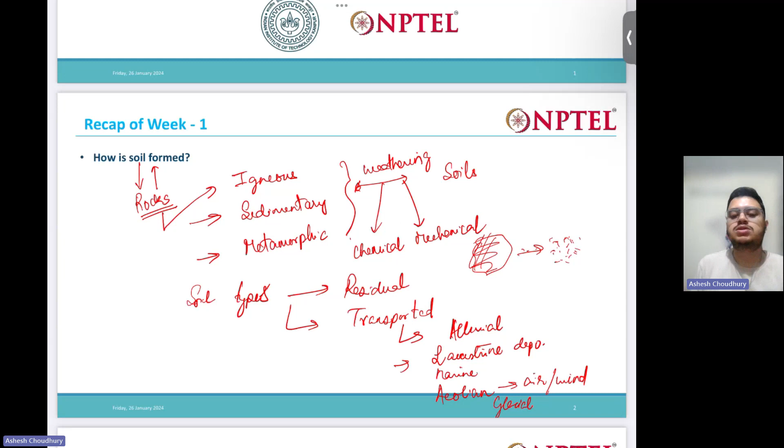The first thing that we studied was soil formation. There are various types of rocks: igneous, sedimentary, metamorphic - these are the main type of rocks. From these rocks, how are soils formed? Soils are mostly formed by weathering, chemical or mechanical weathering, and then they are transported - residual, all these types of soil we studied.

After that, we introduced soil as a three-phase system - the basic main concept of soil. It is composed of three phases: solids, water, and air. Based on this three-phase system, we derived some properties known as the index properties.

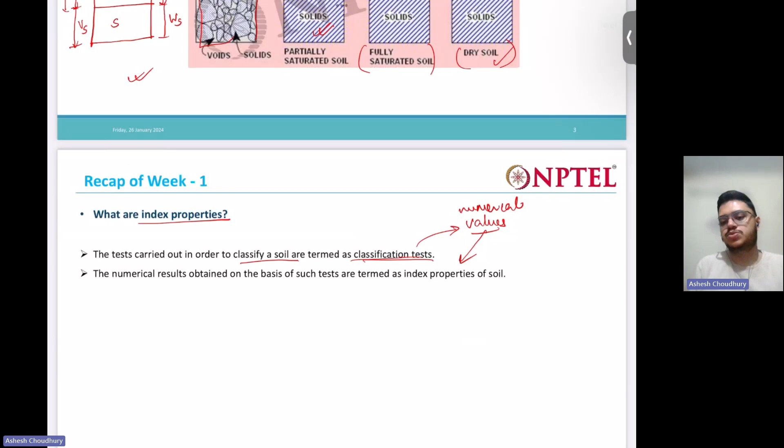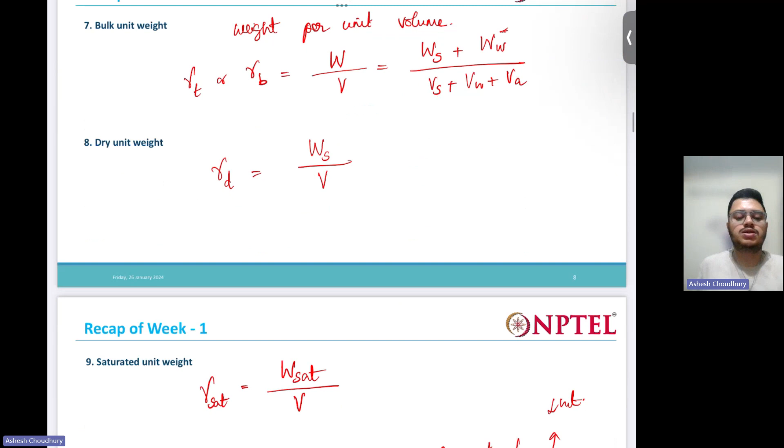So what are the index properties? The tests carried out in order to classify a soil are known as classification tests, and the numerical values obtained from these tests are termed the index properties. Various index properties we studied after that: water content, void ratio, porosity, degree of saturation, air content, percentage of air voids, then bulk unit weight, dry unit weight, saturated unit weight, submerged unit weight - all these types of unit weights we defined, then specific gravity we defined.

After that, we studied the grain size distribution curve and how we can obtain it. The grain size distribution curve can be obtained through sieve analysis. There are two types of sieve analysis: dry sieve analysis and wet sieve analysis. From there we determine the grain size distribution.

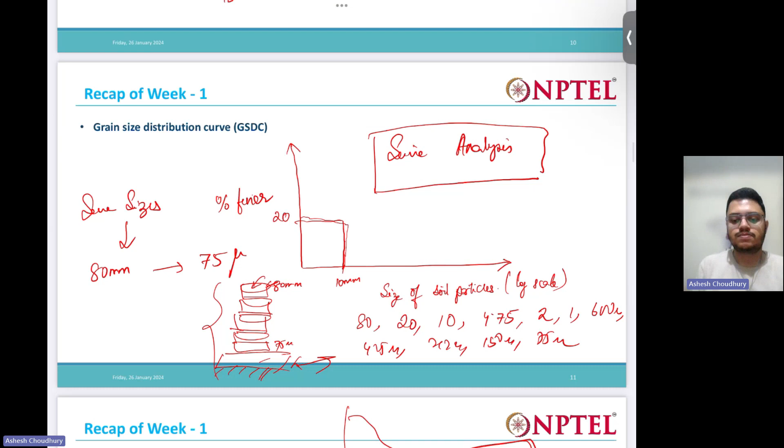We studied how to do the sieve analysis. Then beyond dry sieve analysis, we studied the hydrometer analysis - how to use the hydrometer to determine the fine fraction, to determine the gradation of the fine particle fraction. For that we use the hydrometer, so that we also discussed.

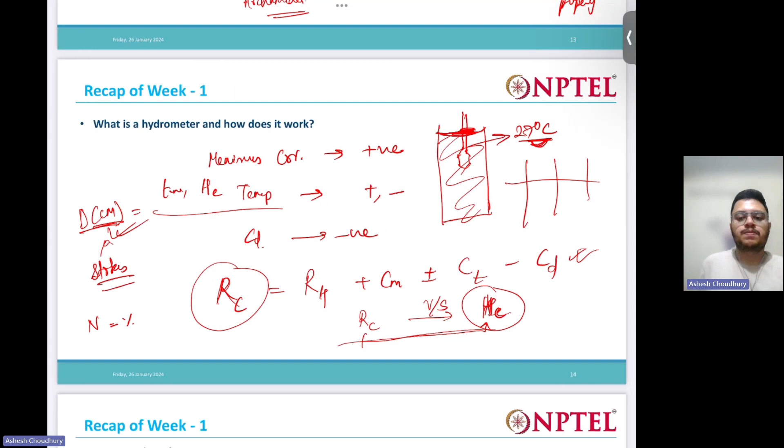Then we studied various corrections - the temperature correction, the dispersing agent correction - all these corrections in hydrometer reading. After that, we defined the D10 size, which is the effective size, CU - coefficient of uniformity, and CC - coefficient of curvature. Those are needed to define the granular soil as well graded or poorly graded.

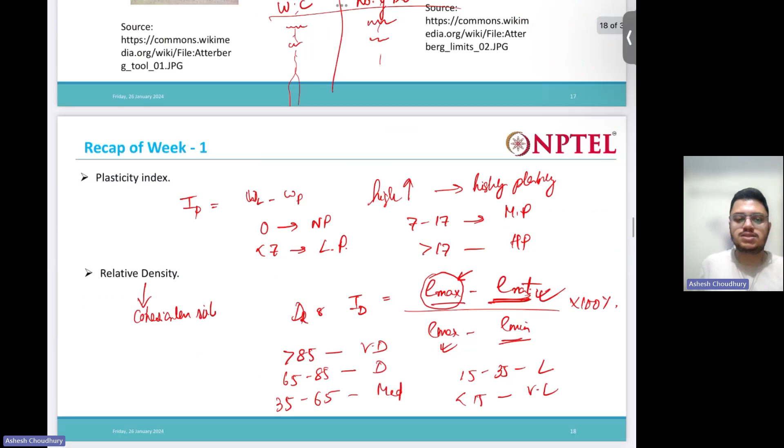After that, we defined the consistency of clays, that is the degree of firmness, and then we defined the Atterberg limits - liquid limit, plastic limit, shrinkage limit. All these things we defined, and how to find out liquid limit and plastic limit we also saw, along with plasticity index, relative density, and other properties.

Then we proceeded to solve the problems. So those were the basics, the main basics of soil mechanics. These basic properties we had used all throughout the course.

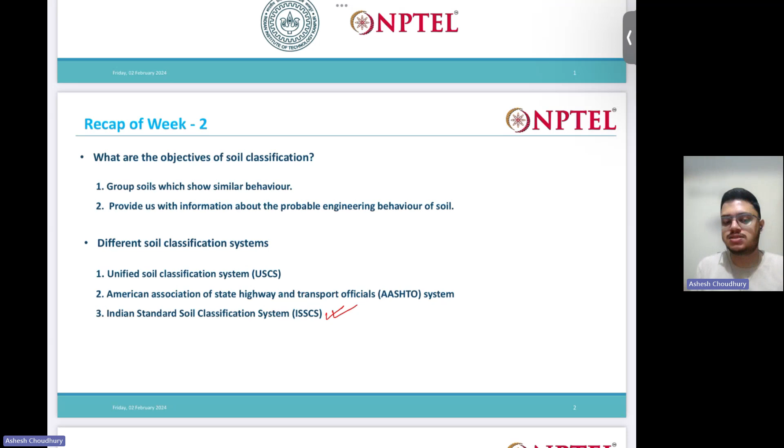In the second week we studied soil classification. Yesterday we recapitulated it by solving a problem. So how do we classify soil? There are various systems - USCS, ISSCS. We mostly focused on the Indian Standard Soil Classification System, which divides soil into major groups. And how do you identify each of these groups? We saw that.

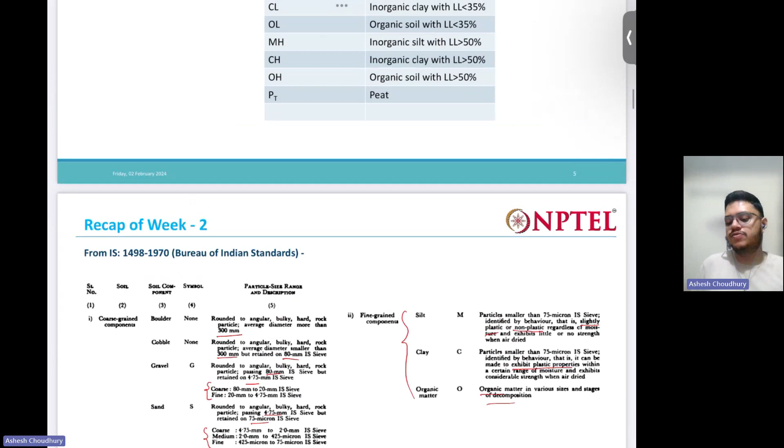If the fraction of soil more than 50% is passing through 4.75 mm, and less than 50% is passing through 75 micron, then the soil is coarse grained sand. Like this we divided the granular classification into many parts. This is the summary of that.

Then we saw how to classify fine grained soil. For that we need to use the A-line chart. The equation of the A-line is 0.73(wL minus 20). If the soil plots above the A-line, it's clay. If it plots below, it's silt.

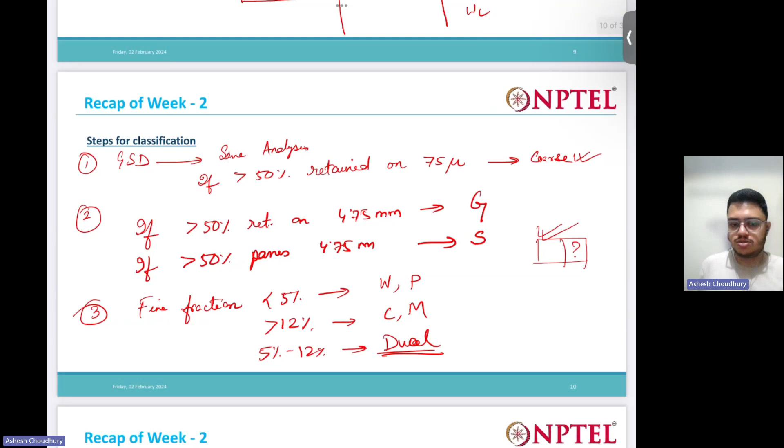Also we discussed various dual nature conditions, where for dual classification we need to use dual symbols. All these things we summarized. I am not going one by one, step by step, in detail.

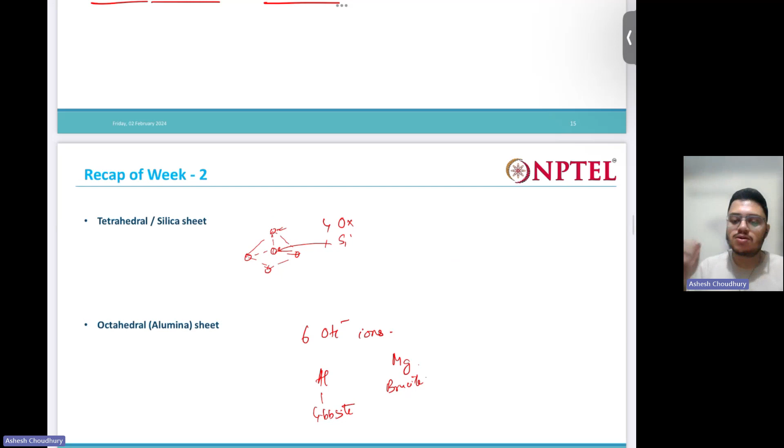After that we also saw what soil structure is, and what specific surface is, and how this influences soil behavior. Then we saw the main minerals that form soil, and the structure of those minerals - the basic constituents and how those soil minerals are formed.

So what are the basic minerals? Kaolinite, montmorillonite, and illite - these are the basic minerals which form fine grained soil. We studied this, and after that we solved numerous problems related to soil classification. I hope this is clear to you, because we will be needing this throughout your life. You should not forget soil classification.

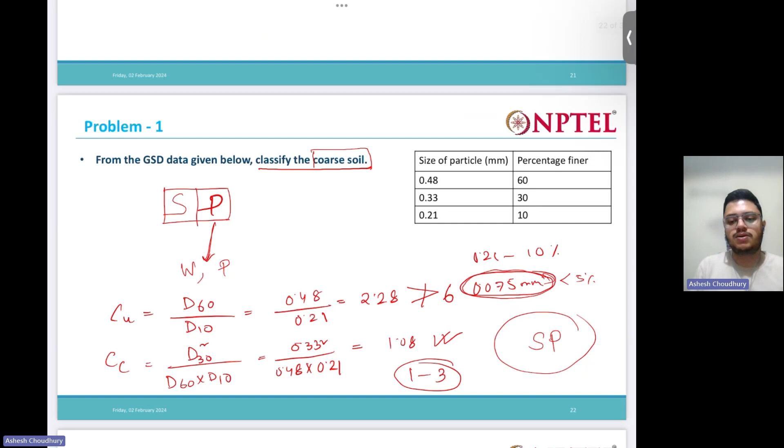Then in the third week we studied soil compaction. So what is soil compaction? Soil compaction is densification of loose soil.

How do you generally do soil compaction in the field? By using road rollers, by tamping, all these things. So what is soil compaction? It is the densification of soil by removal of air. You provide some external mechanical effort, due to which the air in the soil matrix gets removed, and the soil grains attain a denser configuration.

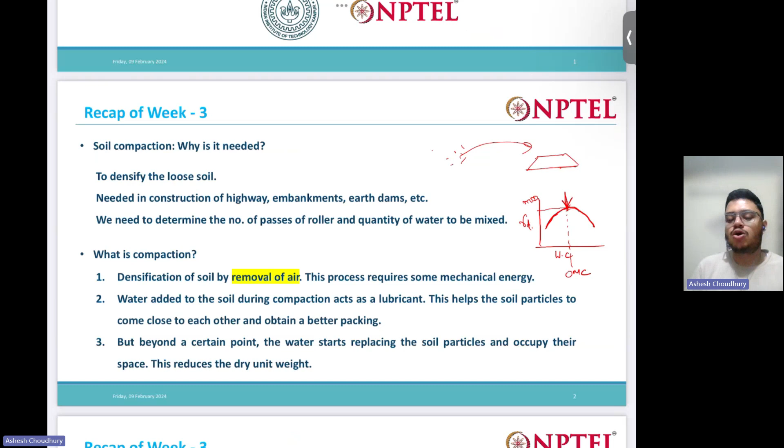Water is added during this compaction process. What does water do? Water acts as a lubricant. This bell curve you see is the typical compaction curve that you obtain. At a certain point you achieve the maximum dry density, and that maximum dry density corresponds to a water content known as the optimum moisture content or optimum water content.

To find the maximum dry density and water content of a particular soil, we use the Proctor test - the standard Proctor test, to determine the OMC. In this test we have a mold of certain volume and size, and we place the soil in a particular number of layers and then tamp it. There is the standard Proctor test and also a heavy compaction test. In both cases the hammer weight, number of layers, and number of blows differ - meaning the compactive effort differs in both cases.

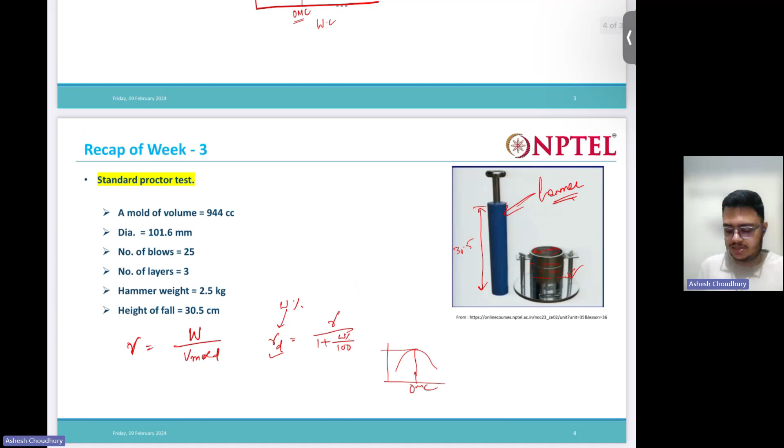Then we defined the zero air void line. What is the zero air void line? It is the theoretical maximum line of maximum dry densities that you can achieve. Generally the compaction curve never touches the zero air void curve - it is always below that.

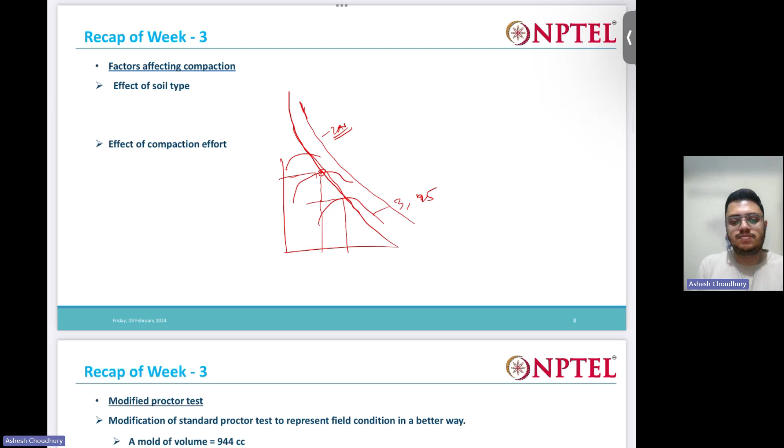Then we studied the various other factors that affect soil compaction - all these things we revised. There is also a modified Proctor test, where the compacting effort is higher because the number of blows are higher, number of layers are higher, and so on.

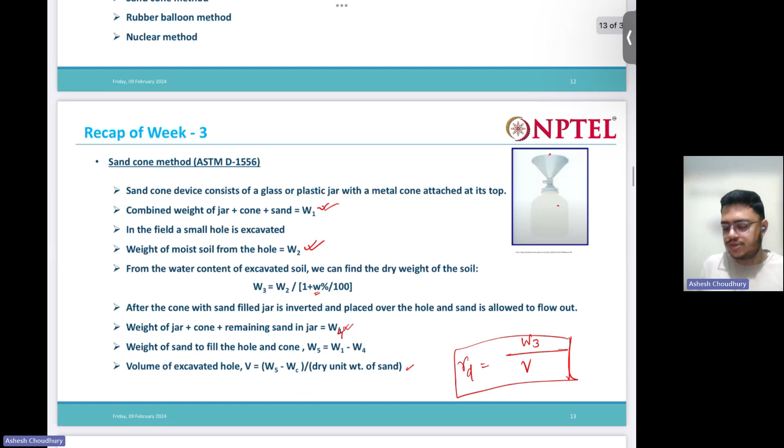Okay, and how do you actually measure the dry density in the soil? There are various methods: sand cone method, and the nuclear method. We discussed the sand cone method in detail, and you can read about all other methods also in your standard textbooks.

After that, we introduced the permeability topic. So what is permeability? Water flows through soil with the presence of interconnected voids. How easily the soil allows the flow of liquid through it is defined by the permeability coefficient. We generally start from the hydraulic gradient, then define Darcy's law: velocity of flow is proportional to the hydraulic gradient, and then we introduce the constant of proportionality, K, that is the coefficient of permeability.

Just a second. Just a minute, I'm getting a call. Just give me one minute. I'm very sorry for the interruption.

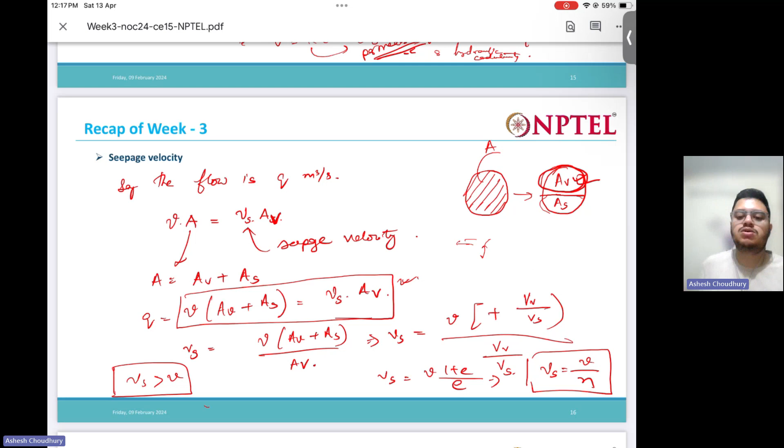Then we define seepage velocity. The seepage velocity is always greater than the superficial or average velocity. That also we derived, and we defined the relation Vs is equal to V by n. There are various factors that affect hydraulic conductivity. Then we solved the problems.

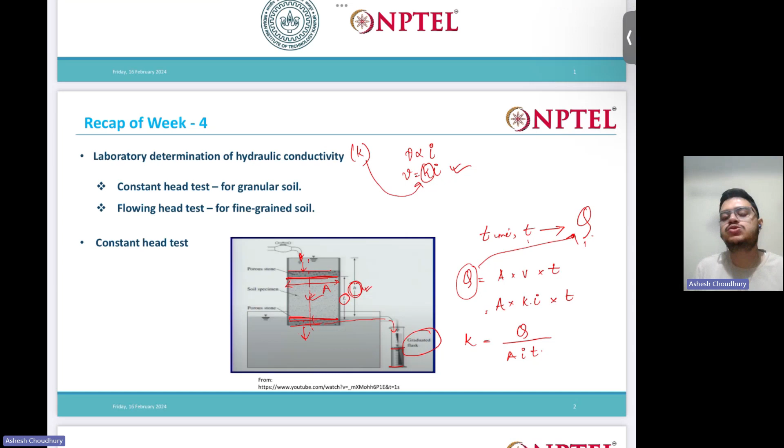Then in the fourth week, in the starting, we saw some tests used for the determination of hydraulic conductivity, or the laboratory determination of hydraulic conductivity. The basic tests are the constant head test and the falling head test. The constant head test is generally used for granular soil, and the falling head test is generally used for fine grained soil. For both these tests, we derived the expressions for the coefficient of permeability.

For the constant head test, the expression is K equals QL by AHT, where Q is the flow, L is the length of flow, A is the cross-sectional area, H is the constant head, and T is the time.

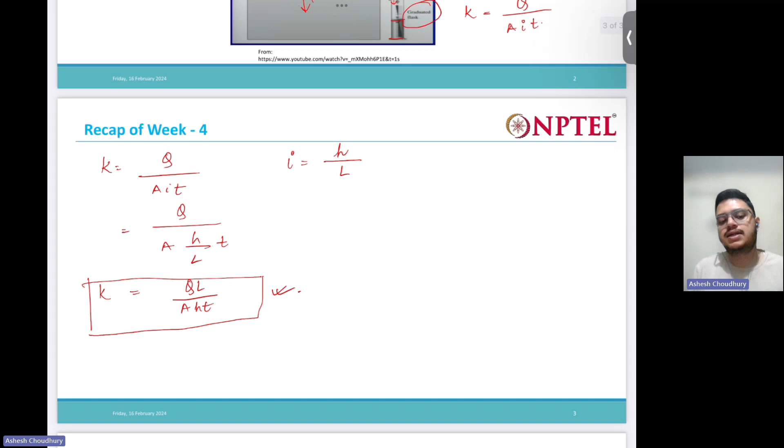Then we derived the expression for the falling head test. In time t1 to t2, the head falls from h1 to h2. Using that, we derive K equals aL by At, times ln of h1 by h2.

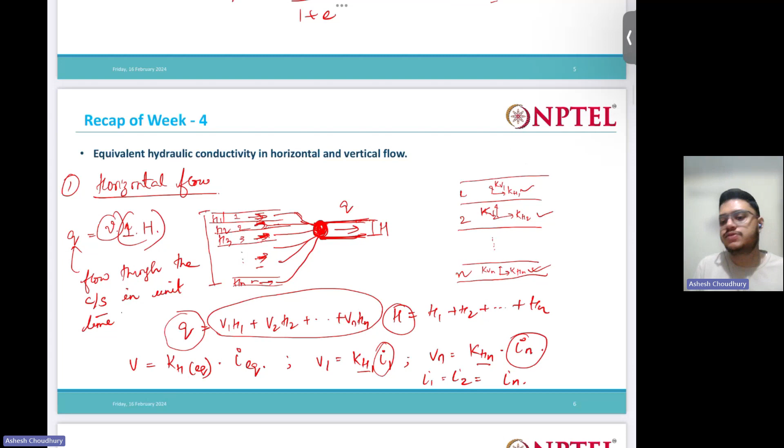Now, apart from the tests, there are some empirical relations also which relate the coefficient of permeability with several other parameters, so those we discussed briefly. Post that, we derived expressions for equivalent hydraulic conductivity, in the horizontal direction and equivalent hydraulic conductivity in the vertical direction. Those you can see here clearly.

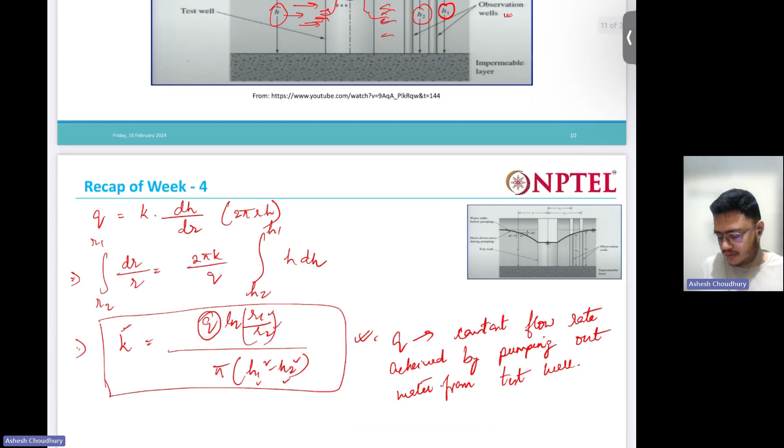Now one more important thing: how to determine hydraulic conductivity in the field. One of the most common methods is the pumping from well method. We discussed how this pumping method is used to determine the hydraulic conductivity, and then we derived the expression. So this was all about permeability.

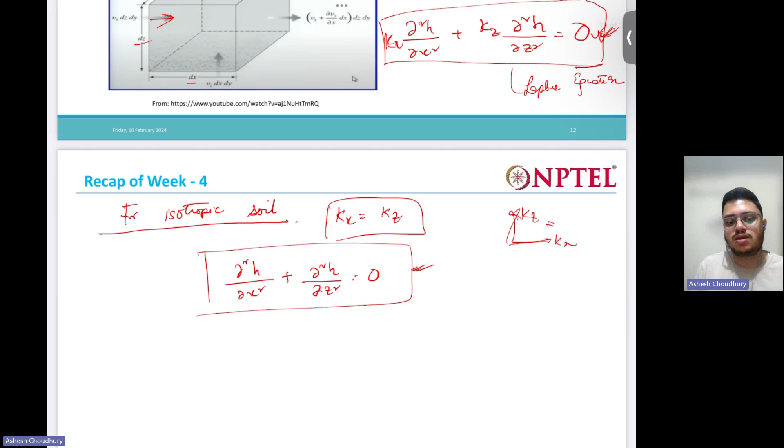For 2D flow we derived the Laplace equation: kx times d square h by dx square plus kz times d square h by dz square, where kx and kz are the coefficients of permeability in the x and z directions. For isotropic soil, kx and kz will be the same, and for that we can write this simplified Laplace equation. For 1D flow we can write this. So we saw all this stuff.

Then the solution of this Laplace equation is nothing but the flow net. There are some properties of the flow net: these lines are orthogonal to each other, cutting at 90 degrees, and they form a family of curves. In a flow net there are two types of lines: one is the equipotential line and the other is the flow line. So all those things we saw.

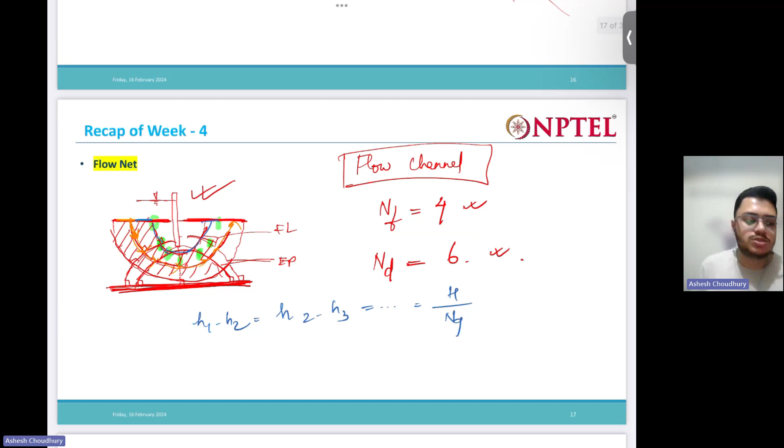We derived various expressions for how, using the flow channels and equipotential lines and equipotential drops, we can actually determine the flow. First we draw the flow net, and from that we find the number of flow channels and number of drops, and from that we can calculate the amount of flow that is happening.

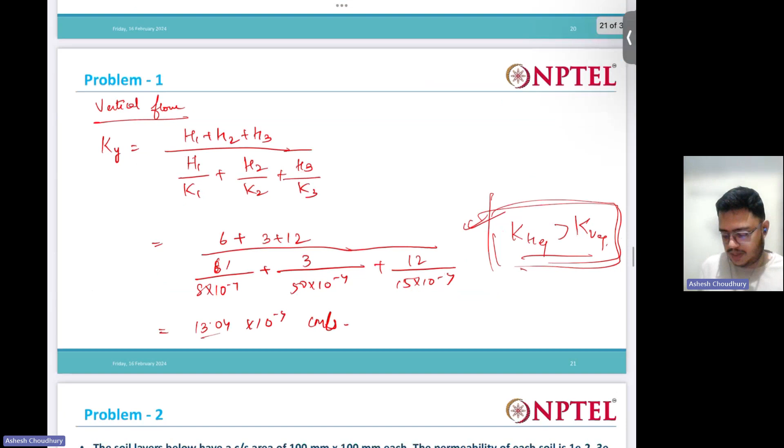Then, as usual, we solved many problems from this topic. I hope these problems are clear to you, and I have solved each one, but I still suggest that you solve all these problems once again by yourselves. Only then will all the concepts be clear, and if I have made any mistake, you can correct it. You should check all the results by solving it yourself.

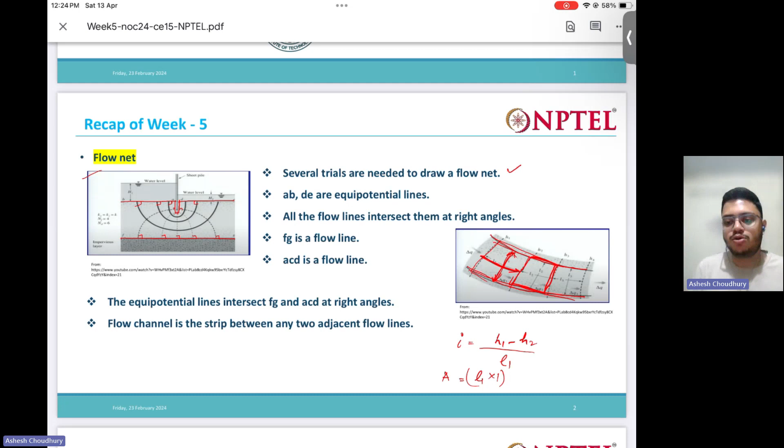Then we discussed how to draw flow nets. Several trials are needed to draw a flow net. I showed you what equipotential lines are, what the boundary equipotential lines are, and what the boundary flow line is.

And for anisotropic soil, what if the soil is anisotropic? Kz and kx are not the same. At that time, how to approximate the Laplace equation, that we also saw.

Flow net is regularly used for determining the uplift pressure under a hydraulic structure, and regarding this we also solved some problems where we determined the uplift pressure from the flow net.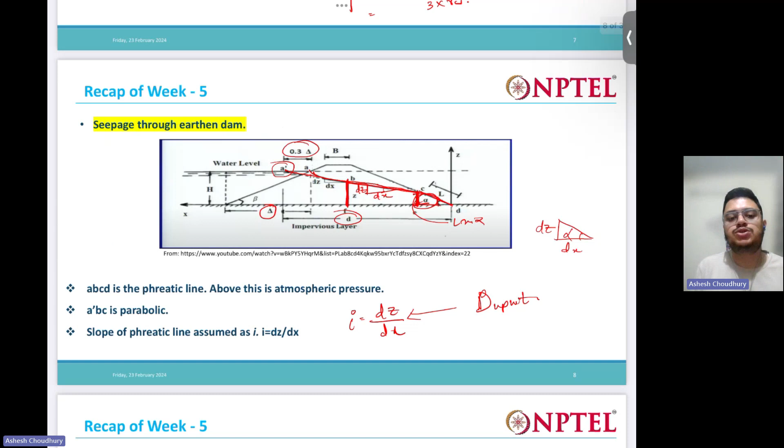After that we started on seepage through dams. These were derived in detail in the class, in the lecture by Professor Ghosh. I think this should all be clear. We saw how seepage through an earthen dam is actually calculated.

That was all about that. Then we understood what in situ stresses are. This is one of the most important concepts: the concept of effective stress. Effective stress is nothing but the stress that is carried in the grain to grain contact. Total stress is composed of the pore water pressure, or neutral stress, and the effective stress. We discussed how this concept of effective stress actually comes about.

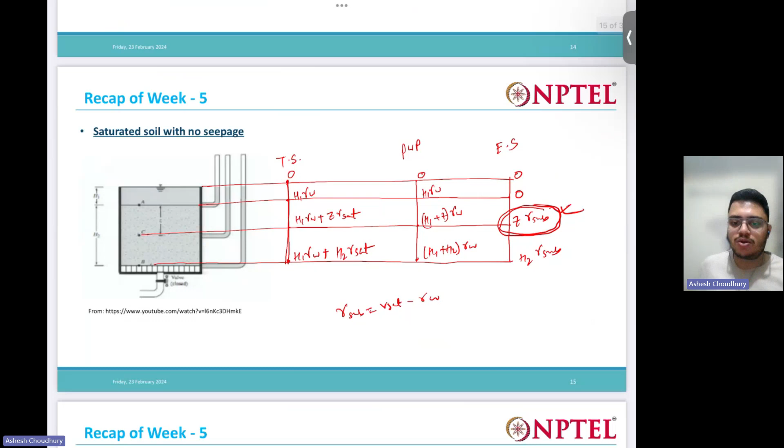Then we saw various cases of seepage condition: no seepage, downward seepage, upward seepage. We plotted total stress, pore water pressure, and effective stress for these. We saw that for upward seepage, the effective stress actually gets reduced due to the effect of upward seepage, and that gives us a critical condition.

If this effective stress becomes zero, the hydraulic gradient at which it becomes zero is given as the critical hydraulic gradient. This critical hydraulic gradient leads to a piping condition, and it varies from 0.9 to 1.1, given by G minus 1 over 1 plus e. Yesterday, if I remember, we had solved one problem regarding this critical hydraulic gradient.

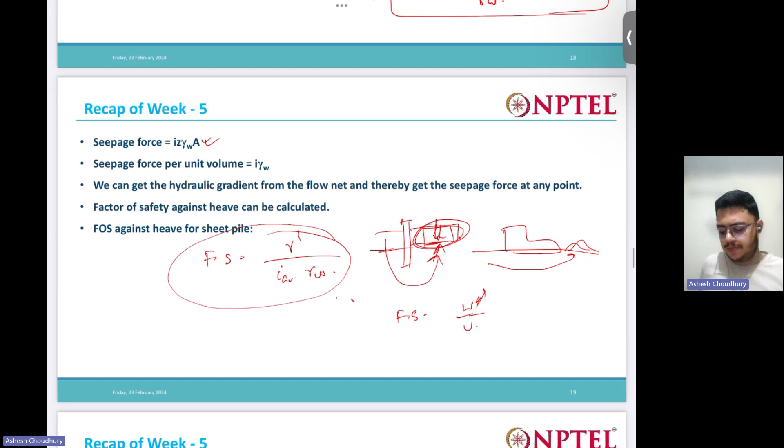Then we derived a term called seepage force. We saw all these things, and then we solved the problems. We solved many problems from this effective stress part, including calculation of effective stress, calculation of total stress, effective stress, and pore water pressure.

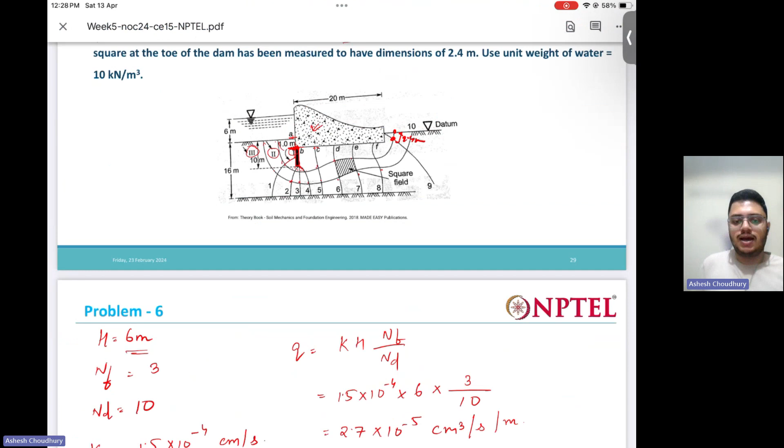And then we calculated some problems regarding seepage through a dam. Also, we solved many problems where we found out the uplift pressure below a dam. I think all these things are clear to you.

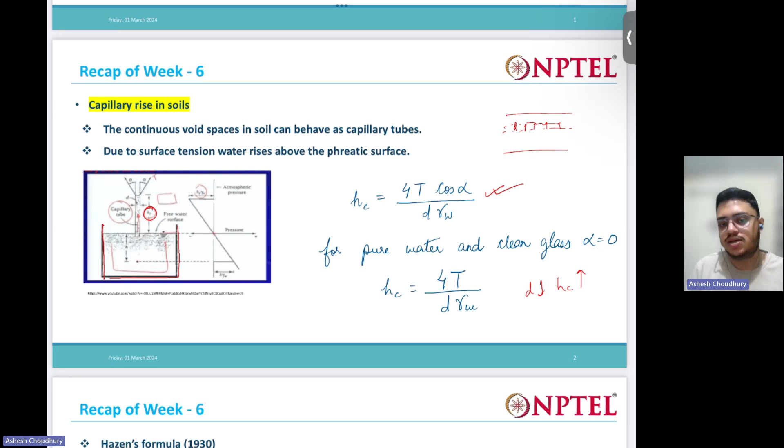After that, we defined capillary rise, how to calculate the height of capillary rise, and what capillary rise is. We also saw what happens to the effective stress in the zone of capillarity. Due to the suction, the effective stress in that zone actually increases, as the pore water pressure becomes negative, leading to the increase in effective stress due to suction.

We introduce one of the most important topics, consolidation, using the spring cylinder model. Initially, when you apply load and are not allowing drainage, the whole load is transferred to the water for a saturated soil. Remember, consolidation is defined for fully saturated soil.

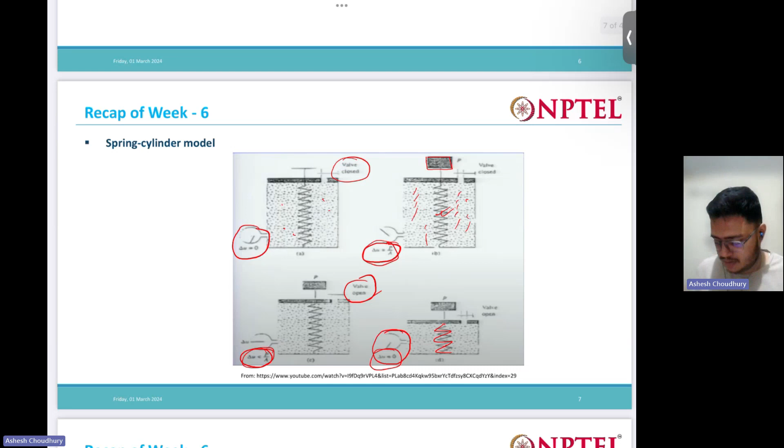As soon as you open the valve, water starts coming out and the load is transferred from the water to the spring, which is the analogy for the soil grains. So the effective stress actually increases, and we saw all the boundary conditions for this.

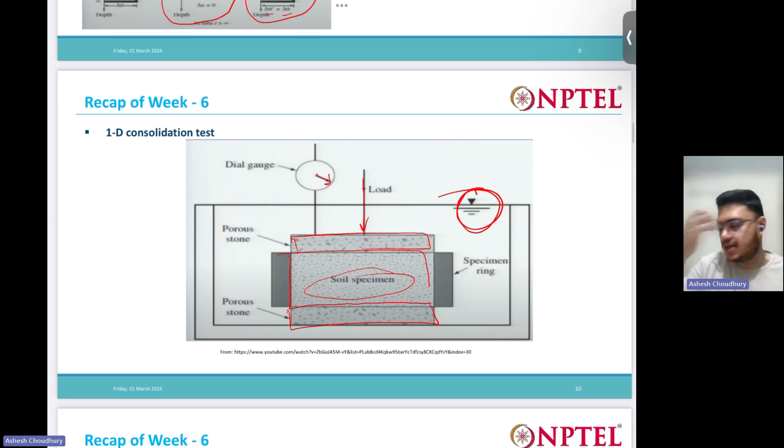Then we discussed the one dimensional consolidation test. We discussed how we can do the test, and how we can get the curves that we need.

So in consolidation, first is the initial compression, that is the elastic settlement, then you have the primary consolidation, and then you have the secondary consolidation.

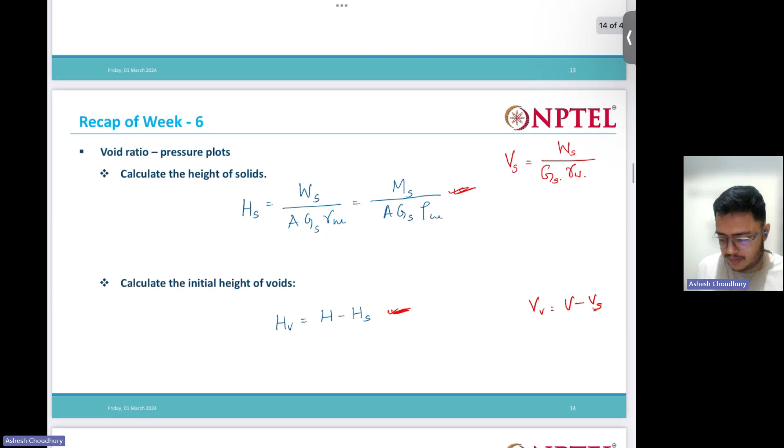So how to generate these void ratio pressure plots? We saw how to generate a typical void ratio pressure plot. There we defined various coefficients: the coefficient of compressibility, compression index, coefficient of volume change, and swelling index coefficient. Among these, Av, Cc, and Mv we regularly use to find the consolidation settlement.

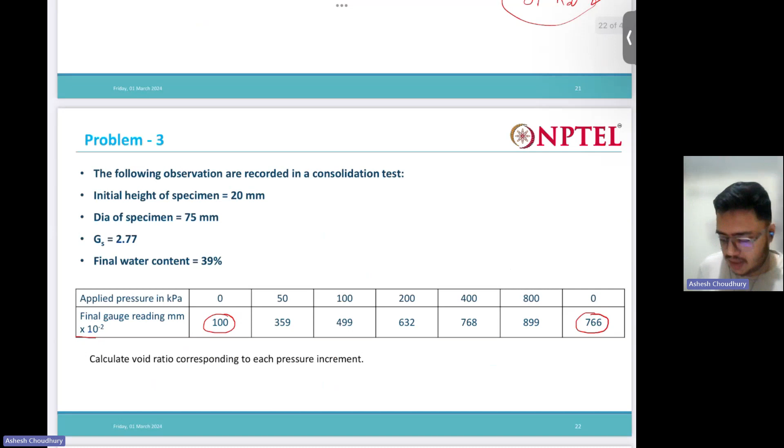We solved numerous problems regarding finding the void ratio pressure settlement curve. I told you that you should be very careful when making this table, else you are going to make a mistake. Generally students make mistakes here. You should be very careful about which void ratio you are calculating the next void ratio from, and all those things.

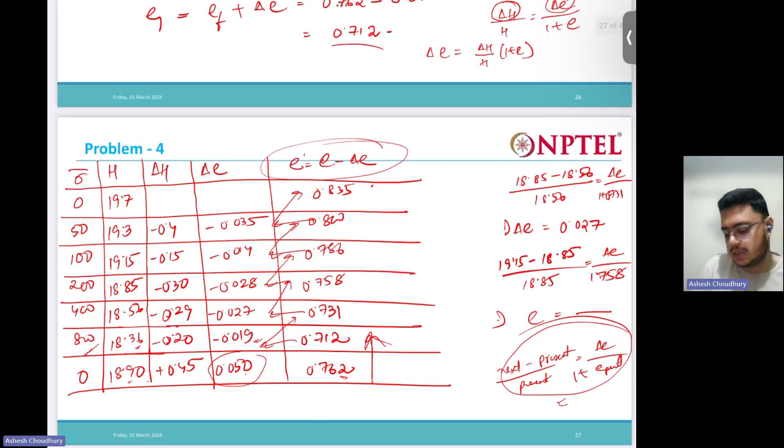Other things we already discussed, right? We generally take a 2:1 distribution of load, and that we take as the increase in load. From that load, how much consolidation settlement is occurring, all these things we calculated.

So next we have these e versus pressure plots, which is what you need to calculate from the 1D consolidation test, right? That we saw.

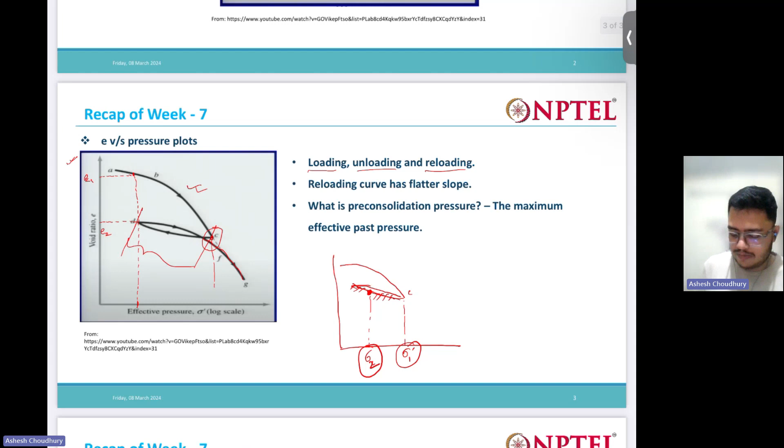There is a loading curve, unloading curve, and reloading curve. We discussed what the pre-consolidation pressure is, and how to determine it using Casagrande's method. We need to draw a straight line first, then draw a tangent, then do the angle bisector, then extend the straight portion backwards to the point where it intersects. That will give the pre-consolidation pressure.

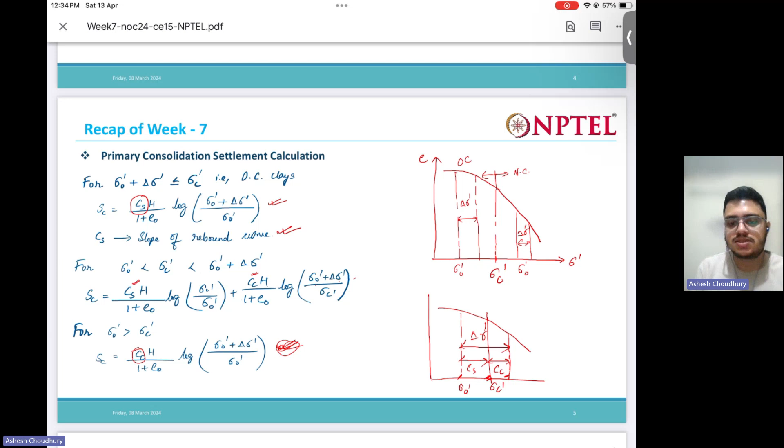For settlement calculation, there are various conditions or circumstances that might come up, and those are discussed here.

Then we discussed secondary consolidation settlement. Secondary consolidation settlement is extremely low. It happens after the primary consolidation settlement due to some plastic readjustment, so it is actually very low.

Then we discussed Terzaghi's one-dimensional consolidation theory, from where we defined the basic consolidation equation: du/dt equals Cv times d-square u by dz-square. That is the basic consolidation equation. From there we defined the coefficient of consolidation, which is k by gamma w times mv.

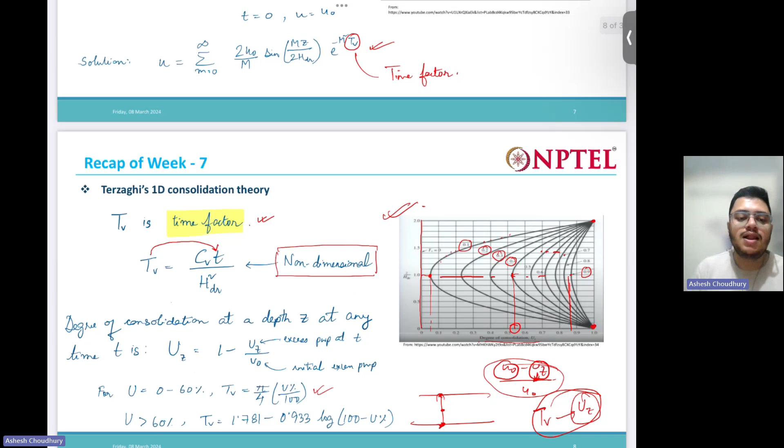From there we saw the solution of Terzaghi's consolidation theory, where u is the pore water pressure, given by this expression involving the time factor Tv. This time factor relates to the time needed for attaining a certain degree of consolidation. This is one of the most important expressions: Tv equals Cv times t divided by drainage path squared.

Okay, then we solved many problems from this. We solved problems related to settlement calculation. Then we solved problems related to how much time will be required for attaining a certain amount of settlement. All these things we solved.

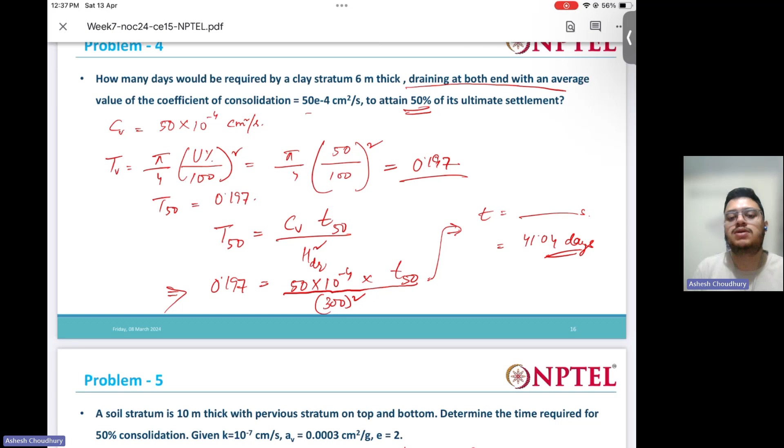And yesterday also we solved one problem. So if you remember, if the drainage path is reduced by half, then the time to attain a particular amount of settlement actually reduces by 4 times. So these were all that we solved. We solved many problems actually.

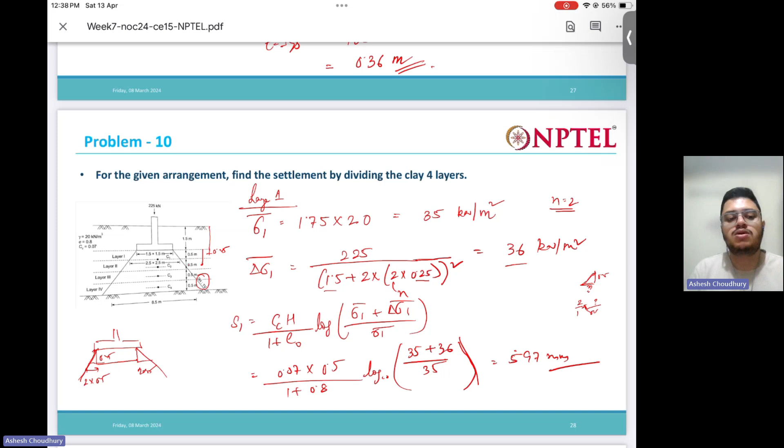So first you divide into 4 layers, then calculate the consolidation settlement, and then divide it into 5 layers and calculate again. After that, if you find the difference between the two is not greater than some tolerance value, you can say this is the optimal number of layers. Otherwise you take more layers. So using a small, easy computer code, you can actually find this.

Okay, so these are all that we did.

After that, we started one more important topic, that is the shear strength of soil. So what is the shear strength? Shear strength of a soil mass is the internal resistance per unit area that the soil mass can offer to resist failure and sliding along any plane inside it. That is how we define the shear strength.

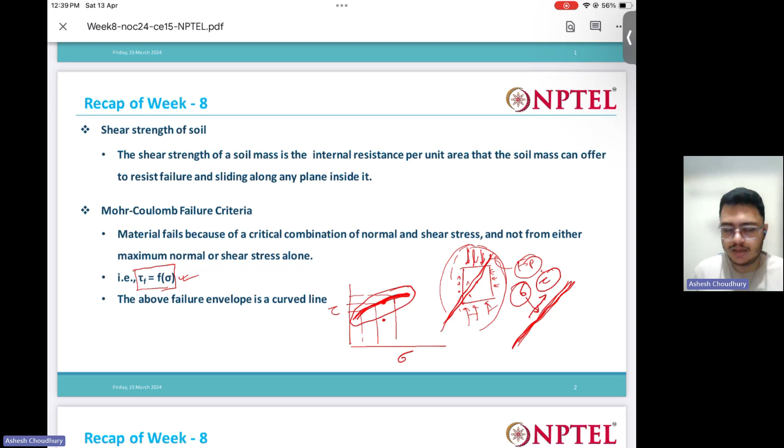One of the main basic criteria is the Mohr-Coulomb failure criteria, which defines that the shear stress at failure in a soil mass is a function of the normal stress. That is generally a curved, non-linear line, but it was linearized using Coulomb's theory, where the shear strength at failure is given as tau f equals c plus sigma tan phi. Here c is the cohesion of the soil, phi is the friction angle, and sigma is the normal stress.

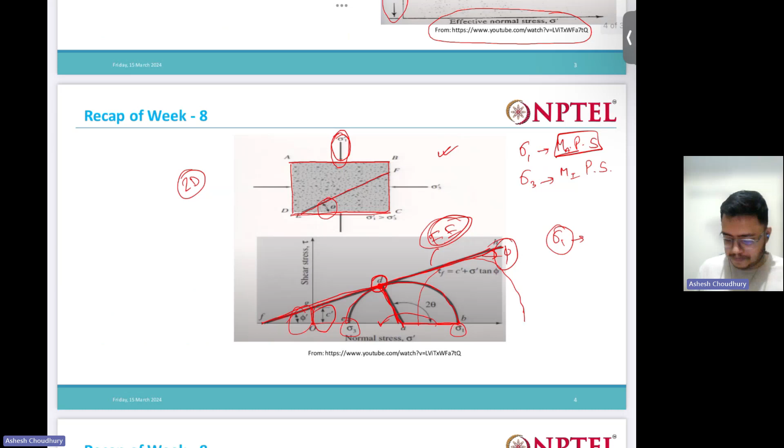c is generally zero for sand or inorganic silt. But then we saw the Mohr circle, and how actually we get this failure line.

After that, from the Mohr circle, we determine one more important expression, the relation between the principal stresses sigma 1 and sigma 3. The Mohr-Coulomb failure criteria in terms of principal stresses is: sigma 1 prime equals sigma 3 prime tan square (45 plus phi prime by 2) plus twice c prime tan(45 plus phi by 2). Now, tan square (45 plus phi by 2) is nothing but Kp, right, Kp.

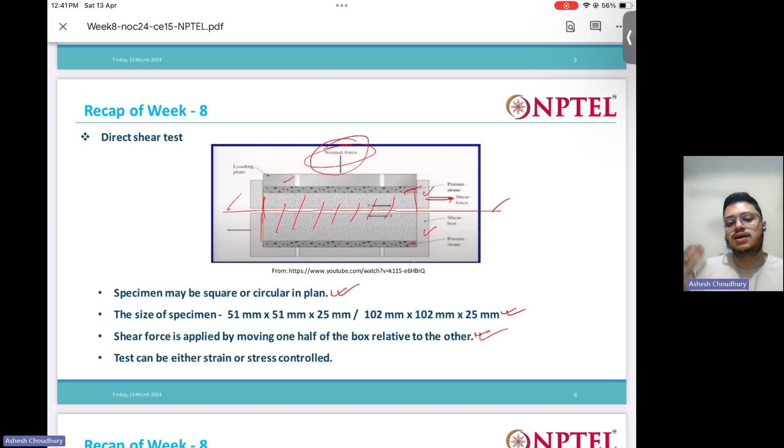Then one of the simplest tests to determine the shear strength parameters, C and phi, is the direct shear test. In this test, we shear the soil mass along a predefined failure plane. We put a normal force and see at what shear stress failure occurs, and we do that at different normal forces, then plot the curve. From there we can get C and phi by joining the plotted points with a line.

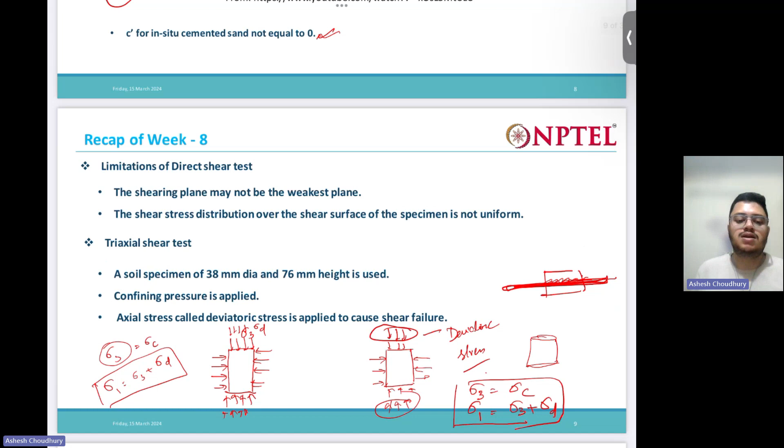These shortcomings are actually overcome in the triaxial test, where we use a cylindrical soil sample, apply confining pressure, and then do the test. There are various types of triaxial tests we discussed in detail: CD test, CU test, UU test — consolidated drained test, consolidated undrained test, and unconsolidated undrained test.

So what are these tests? These tests contain two stages. The first stage is the consolidation stage, and the second stage is the shearing stage.

In the first stage, the consolidation stage, what happens in CD and CU test is we open the drainage valve and allow consolidation to occur at a particular isotropic cell pressure. But in the UU test we do not do that.

In the second stage, in UU and CU test, we close the drainage valve, we do not allow drainage, and then we increase the deviator stress or the axial load. In CD test, during the shearing stage, we keep the drainage valve open.

These tests should be conducted very slowly, else pore water pressure will generate. So CD test is actually very slow, it's very time taking, and we have to do it very slowly.

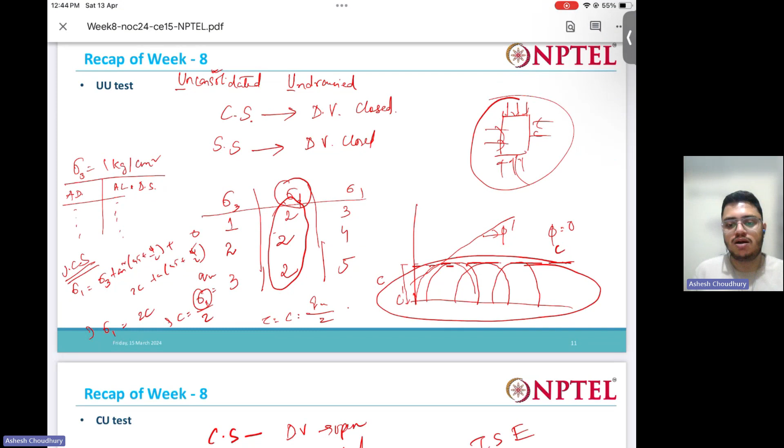So we discussed the UU test in detail, and how the Mohr circle will be obtained in the UU test, that also we saw. Then we saw the CU test, and also discussed the CD test, and saw that for normally consolidated soils, C is generally 0.

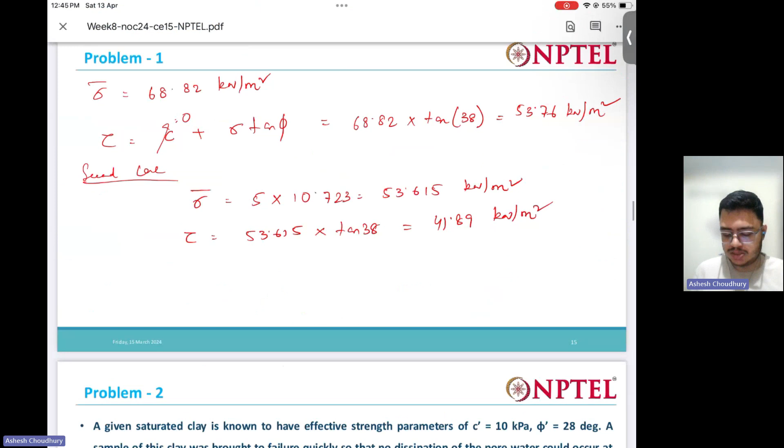After that, we solved numerous problems regarding this. Some basic problems we solved using the shear strength, the direct shear properties. Then we solved some problems from the triaxial test, using triaxial test parameters and triaxial test results.

So everywhere, most of the time, this basic equation is used: sigma 1 equals sigma 3 tan square of 45 plus phi by 2, plus 2c tan of 45 plus phi by 2. So you should always remember this basic equation.

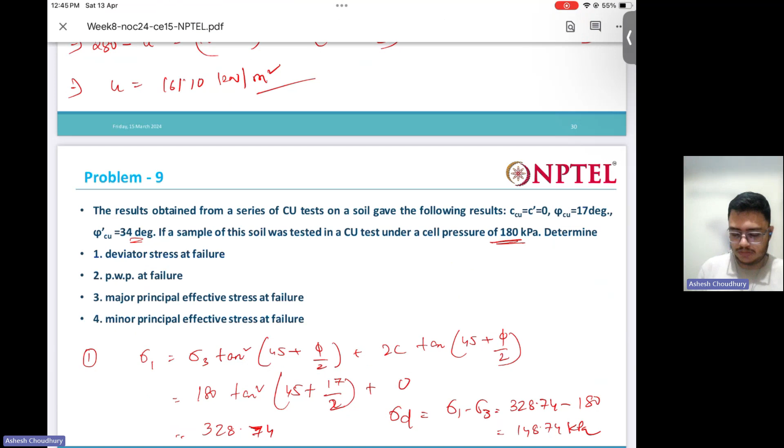Then we discussed the pore pressure parameters. What are these pore pressure parameters? We discussed these in detail. There are two pore pressure parameters, A and B.

The B parameter is calculated in the consolidation stage. This parameter shows us whether the soil is completely saturated or not. So if B is almost near to equal to 1, very close to 1, then we can say that the soil is almost saturated.

Then we define the A parameter. This A parameter is generally seen in the CU test. This A parameter relates the pore water pressure increase due to the increase in the deviator stress.

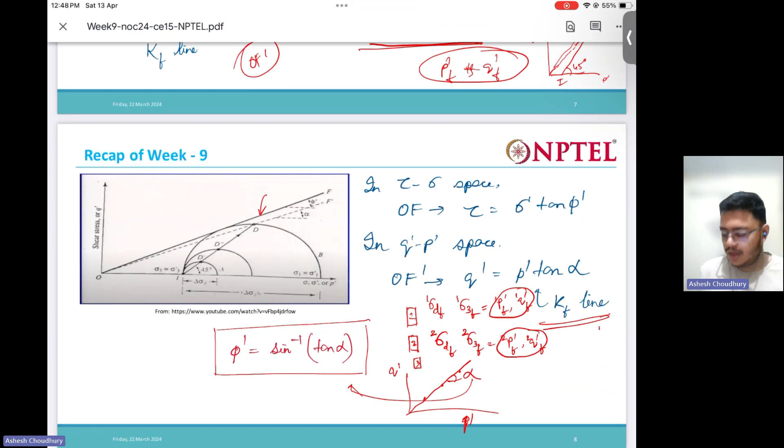This was discussed in quite a detail. Then we saw that from P and Q, if you know P at failure and Q at failure, from there also we can get the C and phi values. That also we saw.

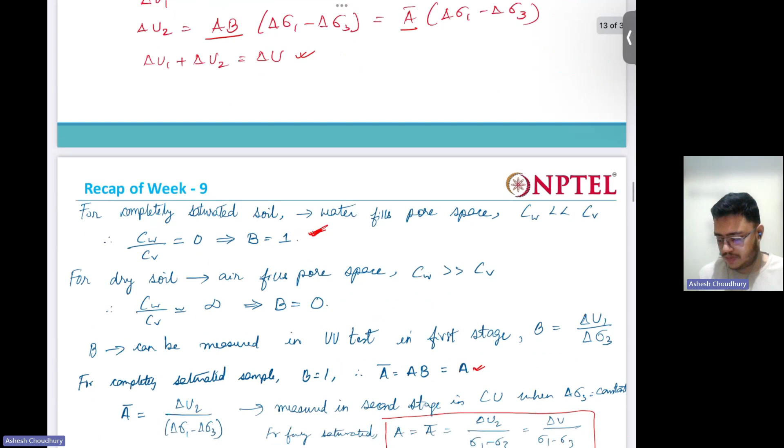These stress paths we saw for CD and CU test for NC clays. We also saw how these pore water pressure parameters are actually derived, and why B is equal to 1. As I said, for saturated soil B is equal to 1. Why B equals 1, that also we saw, and why B equals 0 for dry soil, that also we saw.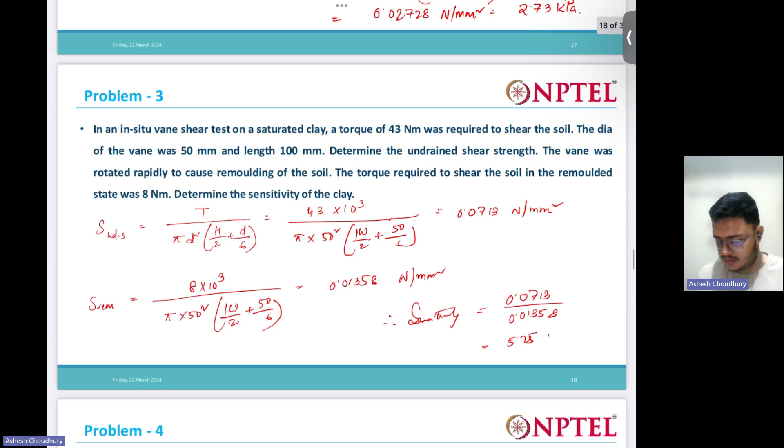Then we solved again many problems regarding this. These problems we can basically solve from the triaxial test results. The problems are quite easy - you just have to plot and tabulate everything properly, and then plot the Mohr circles and get the results.

Then one more large topic, one more principal or major topic in this soil mechanics is the earth pressure theories. So there are three earth pressures: earth pressure at rest, active earth pressure, and passive earth pressure.

So we defined all these things. What is earth pressure at rest? When the wall is not moving, that is the pressure at rest. What is active earth pressure? When the wall is actually moving away from the backfill, whatever pressure is generated, that is the active earth pressure. And when the wall is actually moving towards the soil backfill, at that time we have the passive pressure.

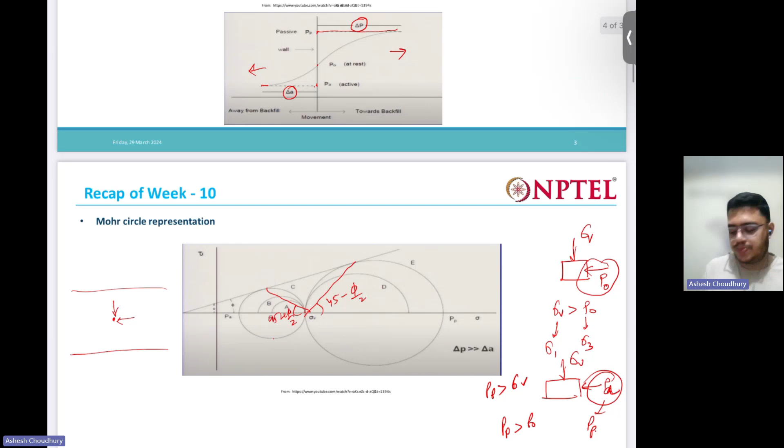So from the Mohr circle, how we actually get this active pressure and passive pressure that we saw. The active failure wedge actually makes an angle 45 plus phi by 2 with the horizontal, and the passive wedge actually makes 45 minus phi by 2 with the horizontal.

Lateral earth pressure coefficient at rest is nothing but mu by 1 minus mu. This we got how? Because the lateral strains are zero. From there we got this.

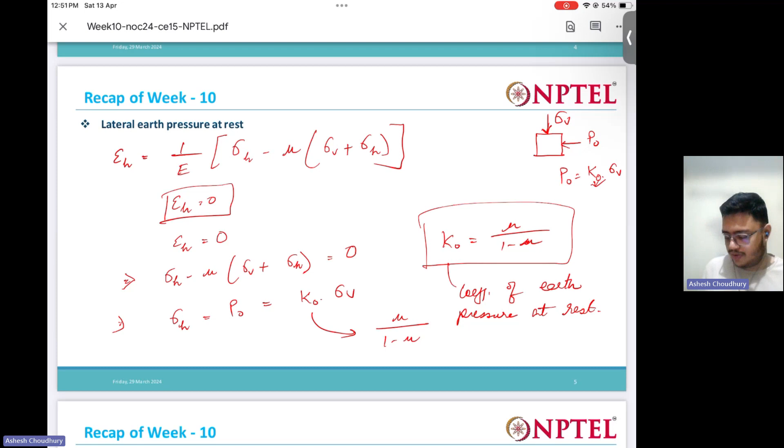Then we actually derived the Ka and Kp. Ka and Kp is the coefficient of earth pressure at active state and the passive earth pressure coefficient. So all these things we derived, and how we derived were just using the basic equation of the Mohr-Coulomb failure envelope in terms of sigma 1 and sigma 3. Using that we actually got this, from there we got this.

So this is the expression. These are the expressions for the granular soil, right? For C equal to 0.

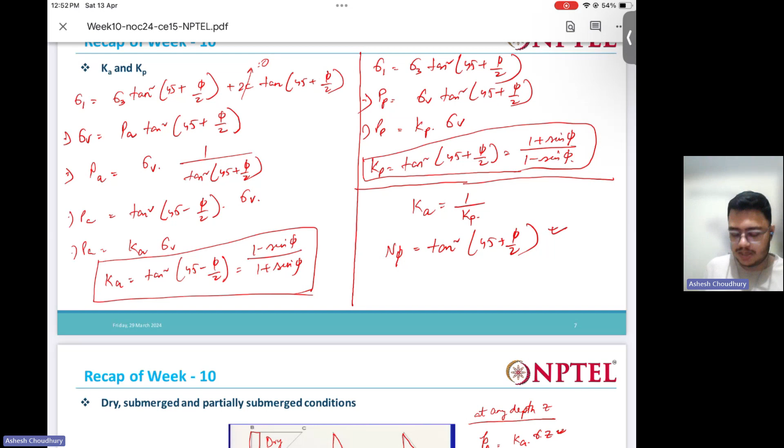And later, in the later stages we also saw for C-phi soil what is the case, right? So there is the extra term minus twice C root over K that comes in case of active state, and there is a term plus twice C root over K that comes in the passive state that we saw.

So what are the stresses in different conditions we saw, and this should be actually crystal clear to you because we solved many problems. Yesterday also we solved, before that week also we solved, in week 10 also we solved. So we solved many problems regarding this earth pressure theories, right? So it should be very clear to you, and you should practice it again and again.

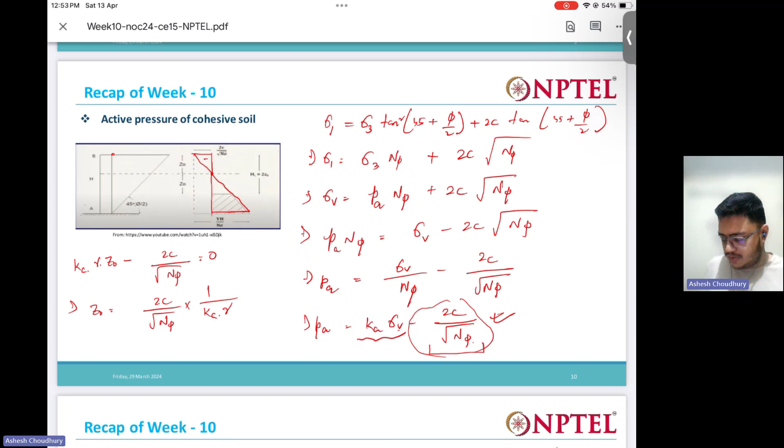So active earth pressure, you can see, as I said, in cohesive soil we have this term minus 2C by root over N phi, which is nothing but minus 2C root over Ka. So these things we saw, and in case of passive pressure it is plus.

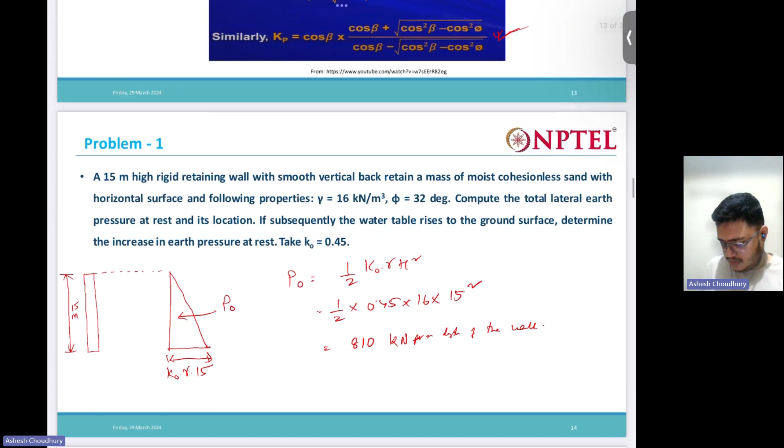Okay, then what we did, we solved some problems. All were basic problems only, not that difficult.

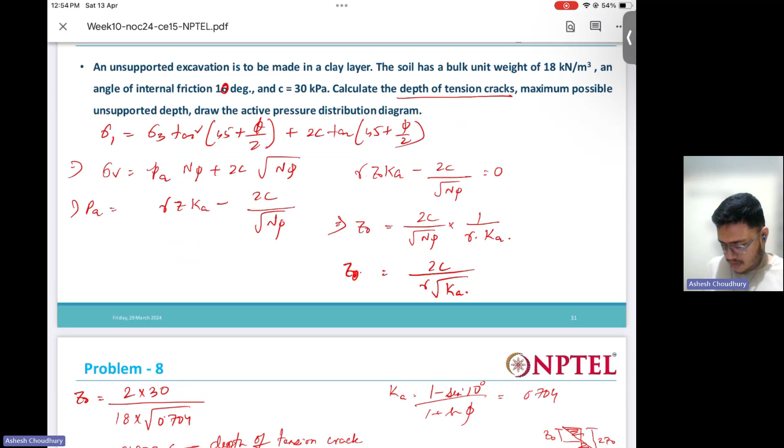And this problem I told you to do in homework, and I hope that you have done this. I won't be solving that. You should do this by yourself.

And then in week 11 we solved problems from stresses in soil and Coulomb's earth pressure theory. So what does Coulomb's earth pressure theory do? Coulomb's earth pressure theory actually considers that there is some friction between the wall and the backfill, the wall is not smooth. And the Coulomb earth pressure theory actually gave a generalized expression, if the wall is inclined, wall is not straight, or if the backfill is not straight, it's inclined.

So for all these various conditions, the earth pressure theory actually gave Coulomb's solution. And then we saw the stresses in soil using the Boussinesq theory and Westergaard's theory. We discussed the assumptions of both these theories and how the expressions are actually derived, and then we solved the problems regarding that.

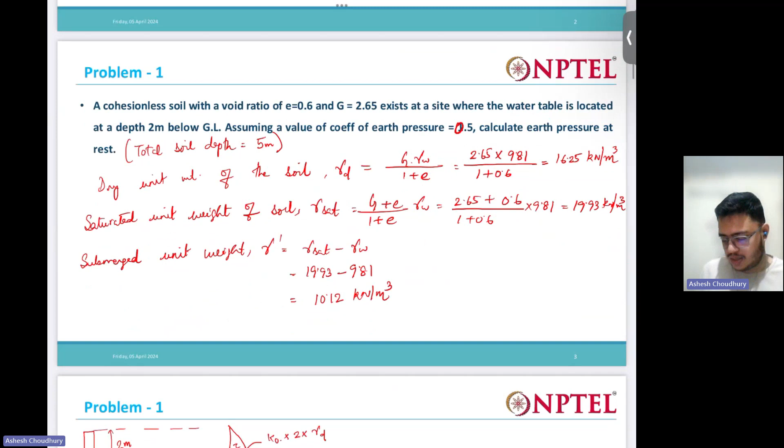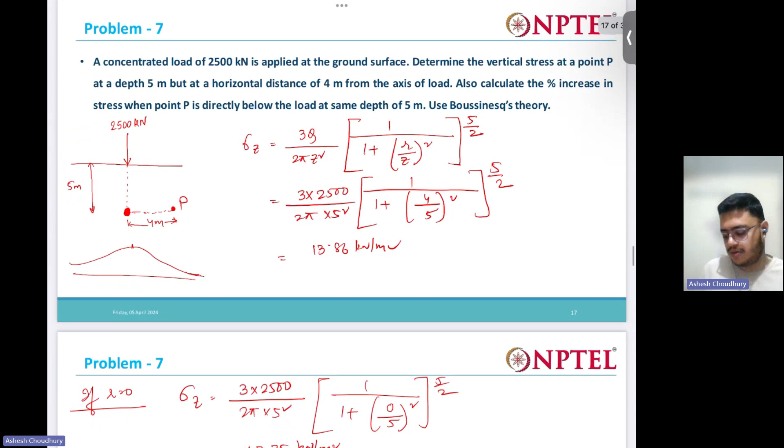So first we solved problems related to earth pressures, many problems again, we solved a huge number of problems regarding earth pressure. And then you can see for inclined backfill, how to solve that also we solved. And then we solved problems for the Boussinesq and Westergaard theory, due to the loading on the soil, how to calculate the stress increase at a certain depth in the soil mass, that we saw.

Mostly these are very easy direct formula based questions, right? Nothing extraordinary, nothing very difficult, direct. And this is a very lengthy problem.

Yesterday also we solved one problem regarding this. So while solving this problem you should be very careful while you put the values in this big expression for k, else you will make a mistake. You should correctly choose this L value, m and n values, you should calculate very correctly, and then you put all the values very slowly in this k expression, then you calculate them.

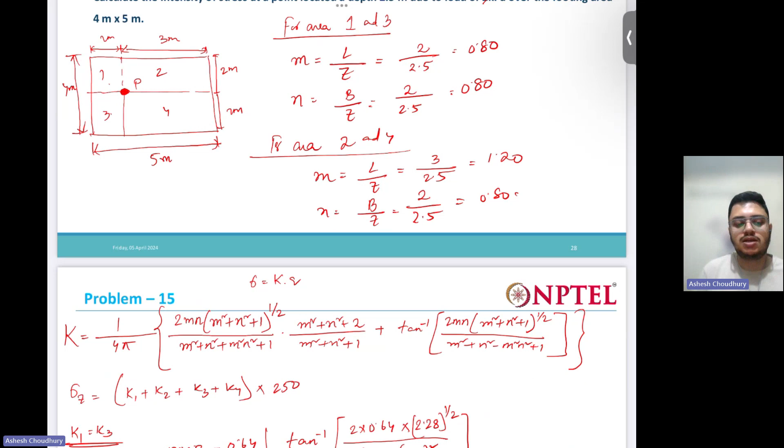Okay, so that was all. And yesterday, so we discussed only, we solved similar problems. That was all.

This is all about this course, and we are going to end this course with this. I hope that all these concepts that were discussed were actually clear to you.

As I said, if you have any doubt, please feel free to contact me anytime. Some of you had also contacted me over email. So if you have any doubts, please feel free to contact me, and I will try my best to clarify your doubts.

I hope that all the topics starting from soil index properties, compaction, seepage, consolidation, permeability, earth pressure theories, shear stress, all these topics you understood very nicely. And we have also solved a huge number of problems from all the topics.